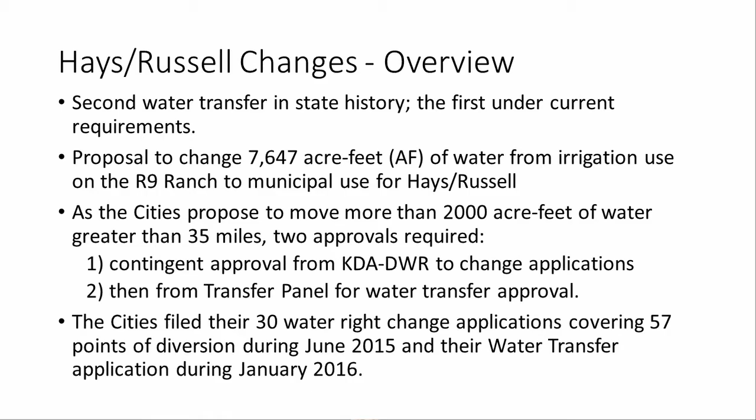The city is proposing to change 7,647 acre-feet of water that's been historically used on the ranch for irrigation use to municipal use for their purposes. So I think I've covered the rest of that.

This is a map of the ranch. In this particular map, and there's a different map in the package that I'll talk about, the red triangles are the existing irrigation wells as they are approved and have been used historically, and the blue pentagon shapes are the proposed locations for the municipal wells.

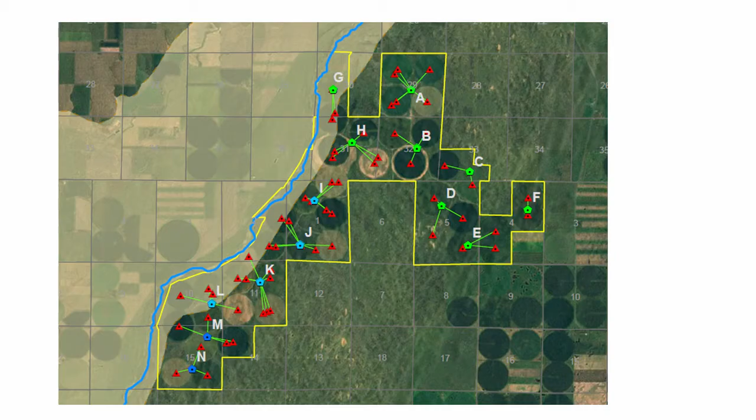They're consolidating various existing authorized irrigation wells into their new proposal. Some of them are blue and some are green. This is a similar depiction, just without an aerial photo in the background, and I think you've got that in the package that was presented here if you want to refer to it either now or later.

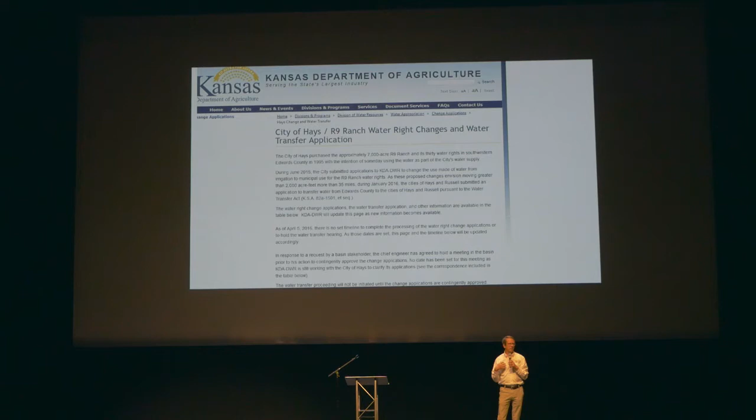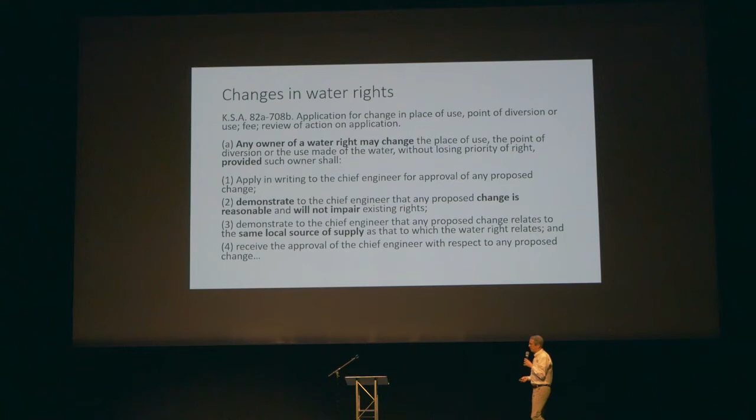I think I've covered most of this. This meeting concerns the change process. I'm not taking questions about the water transfer process that is ahead. The change application decisions are prerequisite to the water transfer process. Again, this is an informational meeting to give you more information and take public comment as input into the decision process. Once the changes are approved, then the water transfer process starts.

This is a section of statute from the Appropriation Act that talks about changes in water rights. Under our Kansas statute, the Appropriation Act provides that someone who owns a water right can apply to have their water right changed. Those changes can be to place of use, point of diversion, use made of water, or any combination of those three. Here the city is asking to change all three: the use made of water, irrigation to municipal; they're reconfiguring the well fields, so the points of diversion will all change; and the place of use will move from the ranch to the cities.

In order for a change to be approved, since water right owners have this right to apply for their water rights to be changed, certain things have to be found true. The change has to be reasonable. We have to know the change will not lead to impairment of other water rights. And the changes have to be within the same local source of supply.

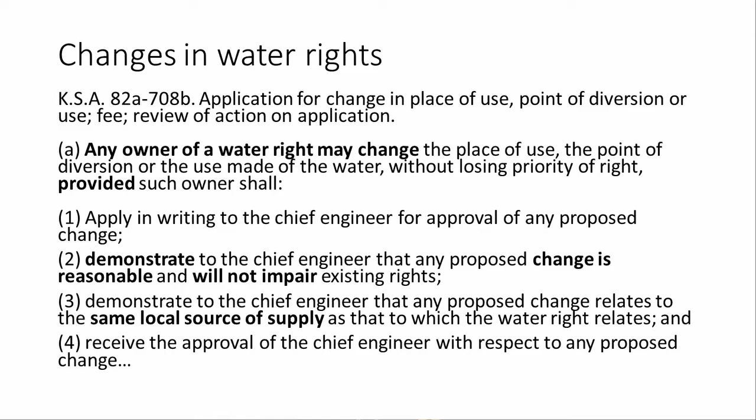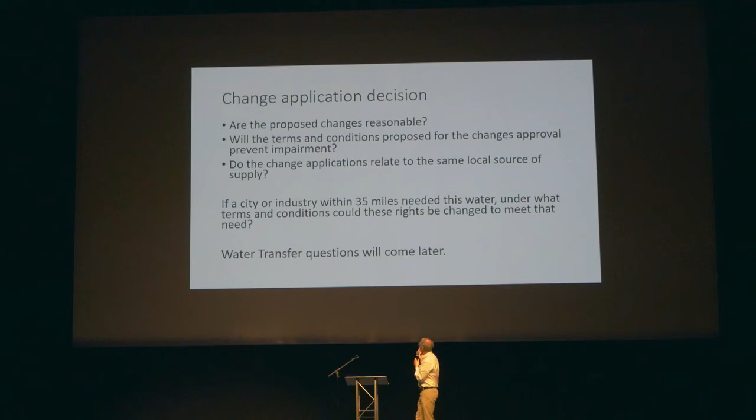And then receive the approval. So really, fundamentally, what we're doing here as we evaluate the city's changes is making sure these things are true and establishing the terms and conditions that make the change reasonable, that ensure impairment will not occur, and so forth. That's really what the process is all about. And again, I've gotten ahead of myself here.

Are the proposed changes reasonable? Will the terms and conditions prevent impairment? Do they relate to the same local source of supply? Again, the transfer process is ahead. I'm evaluating this package as if a city or industry within 35 miles - in other words, one that does not trigger the Transfer Act - is asking for the R9 Ranch's water rights to be changed. Again, what terms and conditions are necessary to prevent impairment and protect the public interest? That's really the question.

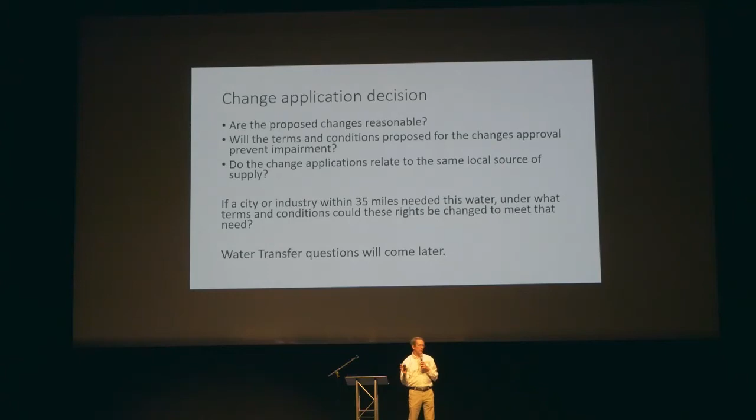The water transfer, weighing the receiving basin versus the donor basin, and all those decisions are for a later process.

I'll repeat this slide in a little more detail later, but we're here to have this meeting. At the end, if you've heard something and want to provide written comment for both the Groundwater Management District and me to consider in our processes, we'd like to receive those comments in the next 3 weeks.

The GMD is really the next step in the process. They have to review all of this and make a recommendation to me as part of the process as well. I think they'd like to have your feedback too as they make their considerations. I've asked the GMD to provide a recommendation to me during August, and then I'll be evaluating the full package of everybody's comments and making a decision in the early fall. Then the transfer process would kick off. So, okay, that's my part.

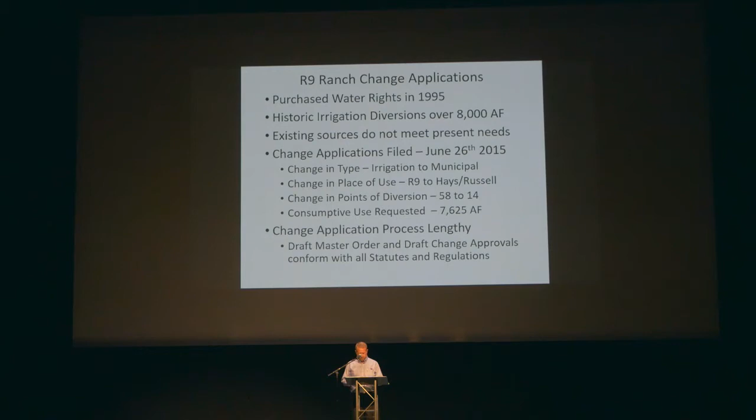The change application process is unique because it is part one of a two-part process. When the change application is deemed complete, the cities will undergo the provisions of the Kansas Water Transfer Act. Because of this unique consideration, because of the unique situation, the cities asked the Division of Water Resources for a few considerations.

The cities asked for a delayed effective date of the order. That allows the cities to navigate the transfer process before the order formally becomes effective. The cities also asked for deferred identification of the final well locations. This will be discussed a little further in our presentation.

The cities asked the Division of Water Resources to approve the total quantity with the order, with actual usage based on demonstrated need. This is also going to be discussed further in our presentation. This aspect is critical to the long-term economic viability of the R9.

Most importantly, the cities are committed to a sustainable operation of the well field. It is not in the city's best interest, and the R9 will not be a long-term economic project, if we don't use it sustainably. The cities plan to agree to a sustainable yield limitation in the master order. This is a unique change application requirement, and unique in the state of Kansas. The cities feel they're going above and beyond with this commitment to sustainable operation.

Earlier today, I was told there were a couple questions about usage of the property as it is transitioned to a well field. Beginning in 2013, farming was phased out at the R9. 2017 was the last year of crop production. I believe there were 7 circles in operation in 2017.

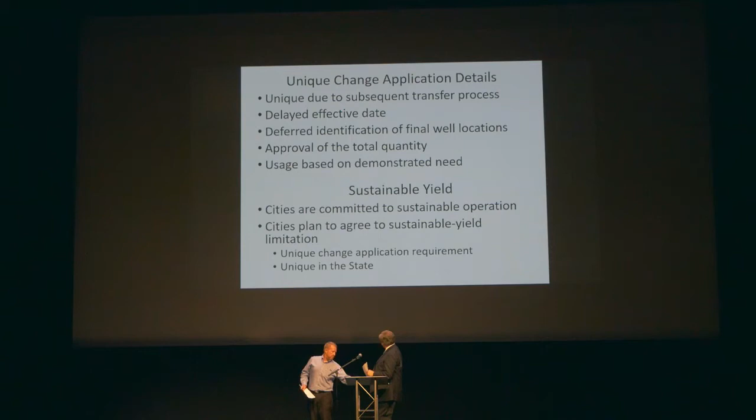So, these changes are unique in some ways, and they're ordinary in others. They're ordinary in the sense that the draft master order that we've been discussing and negotiating with DWR complies, as Toby said, with all the rules and regulations.

There are no waivers of the regulations, either DWR or GMD regulatory requirements. But we did file these applications in preparation for a transfer, and the normal process for making a change involves testing and design, figuring out where you want the well, then a change application, then approval, and then well construction. Because the transfer proceeding is coming up, we asked for permission to move the testing and design process to the end, so that it can be done in conjunction with the design of the overall project, the pipeline, and other infrastructure components. And DWR was willing to do that.

As a result, we asked for some flexibility, greater flexibility than is normally the case, with respect to the exact well locations. And I think Brian Meier will talk a bit more about that here in a few minutes.

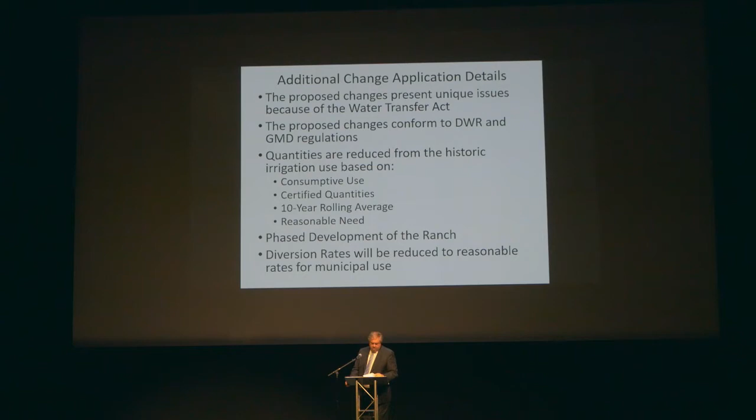And we anticipate them actually diverting significantly less than 500 gallons a minute. So if the master order is approved as drafted, the quantities of water that can be diverted in the long term are sustainable, even though other water rights in the region are not so limited. With that, I'm going to turn it over to Brian Meier.

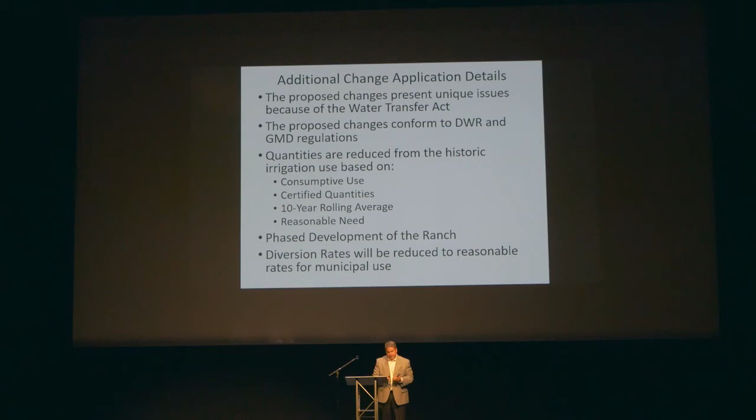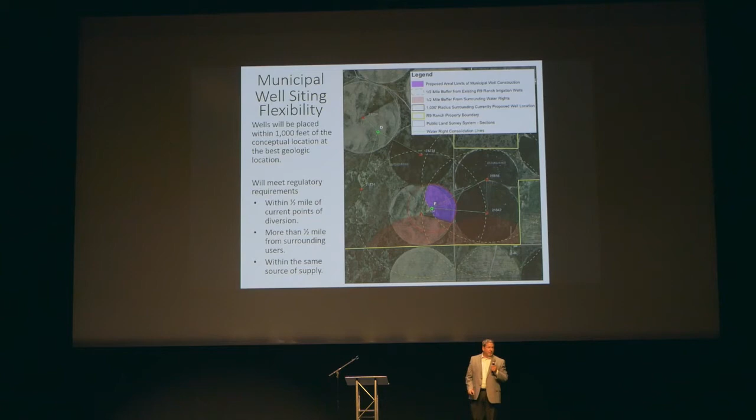As Dave said, I'm Brian Meier with Burns & McDonnell. I appreciate the opportunity to be here today. As you've heard, it's kind of a reoccurring theme: this is a unique process because of its length, its two-step nature, the change applications followed by the transfer process, which creates some unique challenges. They've been mentioned in general, and I want to go into a little more depth on a couple of those specific challenges.

The first one is looking at taking those 50-plus irrigation wells and consolidating them into 14 municipal well locations. Knowing this is a lengthy process, and as Dave said, deferring the significant field investigation to a later point in the study, we had to look at what's the best reasonable alternative to determine those locations.

So we started with the requirements of those change in point of diversions. Well, you want reasonable control over it. This example shows that we're looking for proposed well D, for a municipal supply point, close to these three wells. So what would be the basic requirements?

Well, we need to be within half a mile of each of those former irrigation points of diversion. So you have those circles, which create this rather unique geometry or area that you identified. Then another requirement was that we want to stay at least a minimum of half a mile away from any other authorized point of diversion. So you see down here in the shaded color, which also added to, or changed, the geometry of that area that would meet those requirements.

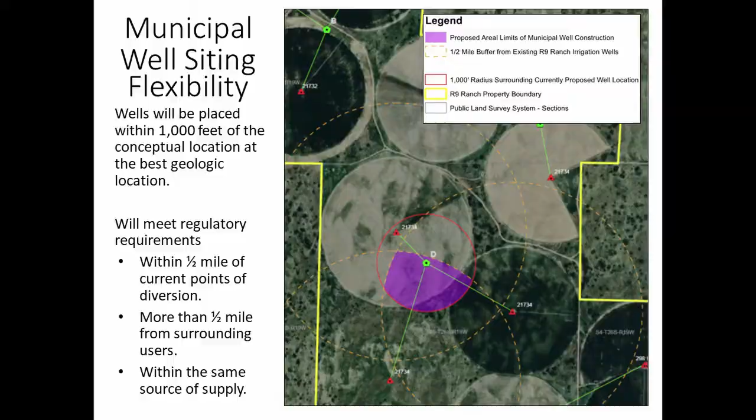So once we established that, we're looking at the next theme you've heard a lot about that makes this project unique, and that is the commitment to sustainability, which is such an important element of any public water supply planning process. This has to be something that's viable for the long term. So how do we determine that?

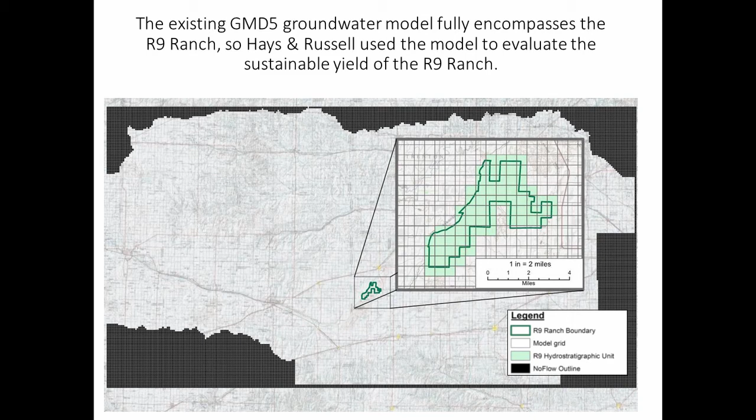We know we had the 7,625 acre-feet determined from the consumptive use. Well, what's the real number that defines sustainability? In this case, sustainability is those withdrawal rates that will result in long-term stable water levels. So how do we determine that? Well, we went out and looked to see what tools were available. And of course, one of the main tools available was the GMD5 model, which had been reviewed, vetted, and approved for similar use. So that seemed like the logical tool to use.

And of course, it covers the entire GMD, which encompasses the ranch. So it seemed like a good path you could take.

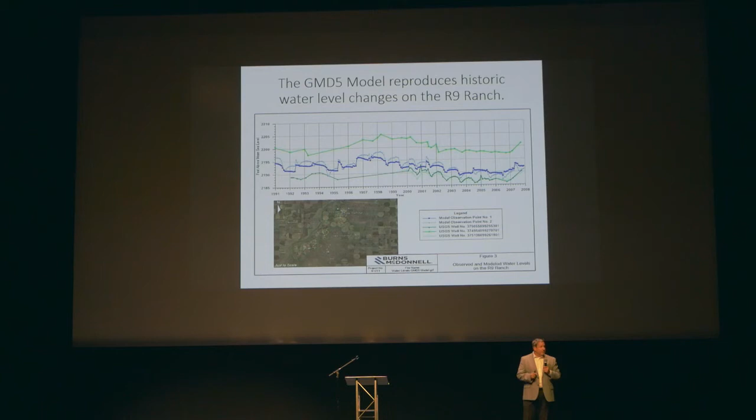But the next step was to make sure that in the ranch area the model was going to perform adequately. We needed this, so we picked a period where we had good information regarding what was produced on the ranch, good numbers, good data, and we also had good observed water level responses during that same period. So the model was run through that period with actual data and compared to the observed water level changes on the ranch. This graph demonstrates a very close correlation between the water levels the model produced and the water levels that were actually observed. That gave us confidence that this was a good tool to use to move forward to calculate sustainability.

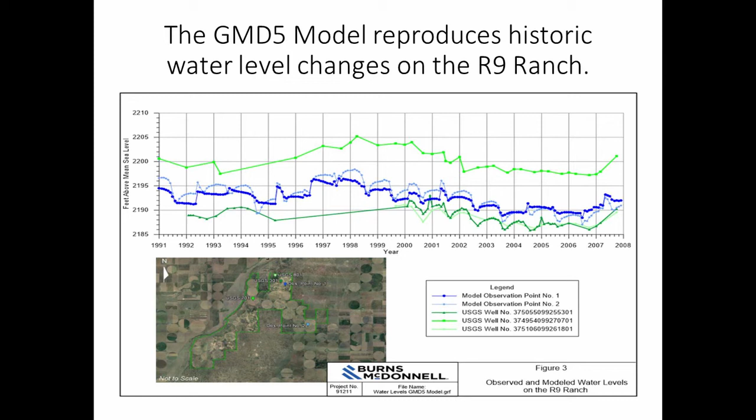So the next step was to do iterative model runs, to look at what that capacity or diversion rate was that would produce those sustainable water levels. In this graph, on one side you see the quantities diverted in various scenarios, and on the bottom you see the change in water levels. We ran a number of scenarios using those same observation points on the ranch to look for that stable water as a result of the model run. The green box in the middle represents a band of stability. In general, 4,800 acre feet was the number identified as a sustainable yield where you would see those relatively stable numbers long term. So those model runs were used to calculate that.

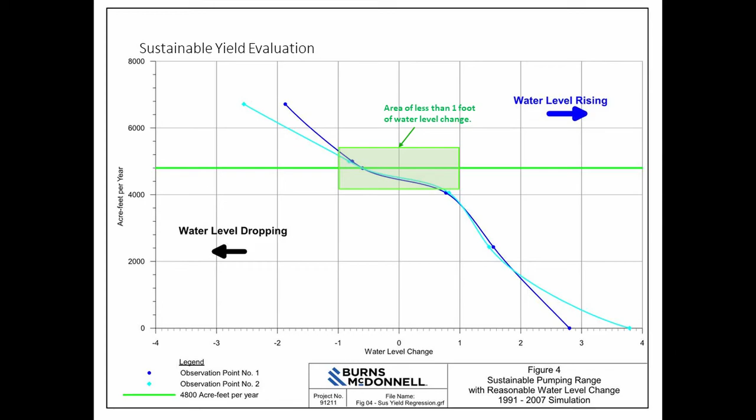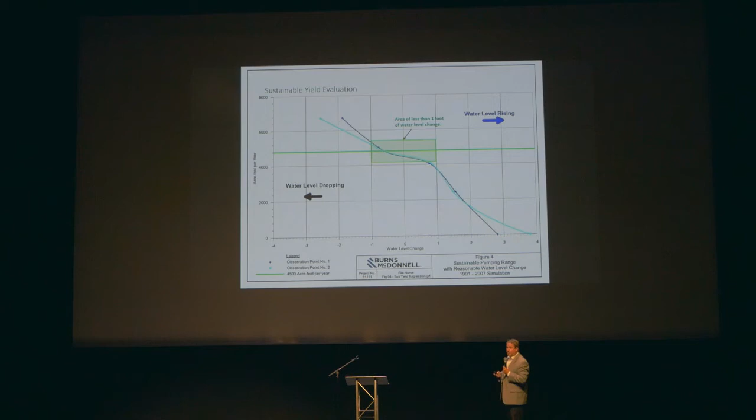So what does that sustainable operation really mean? Well, as Dave said earlier, in any given year we have the capability to produce up to a maximum of 6,700 acre feet. But on a 10-year rolling average, 4,800 acre feet per year is the max. And also, as stated earlier, with the planned phased development of the ranch, it would be a long process to work into those upper levels of development or higher quantities.

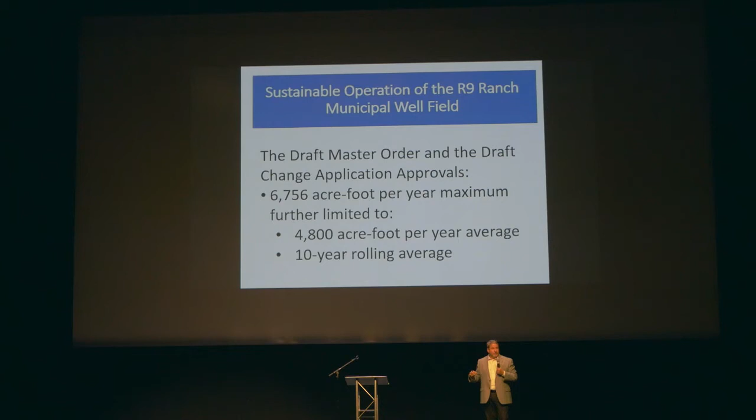Additionally, when we looked at this sustainable approach, and considered what the Great Bend Prairie RAC goal was—to provide sustainable groundwater withdrawals by 2025, I believe—we felt like this was a good match and a good approach to take. With that, I'll turn it back over to Dave.

Okay, from here I'd like to do a brief overview of the draft approval documents. Again, we've got these on our website. There's one you referred to as the master order. It's basically a draft proposed order that would approve these applications. Again, we're not through the process yet, so it's not final. The input we're receiving from the GMD and you all is going to potentially affect the order.

And then we've got another document that's really an attachment to the proposed draft master order, which are the individual approvals, showing the specific terms and conditions of each individual water right and its proposed attributes after the change. So I'm just going to go through and highlight them. The cities have already talked about some of the features, so I won't go into a lot of detail where they've already covered it.

Now, first of all, why do we have this draft approval document at this point? I wanted to talk about our general process for reviewing applications. Normally, we receive an application from a water user that wants to change a water right. We review that application for completeness, and we review it for conformity to the rules. There's sometimes some back and forth with applicants to make sure that the change is going to meet their needs that are spurring the change, and again, meets our rules.

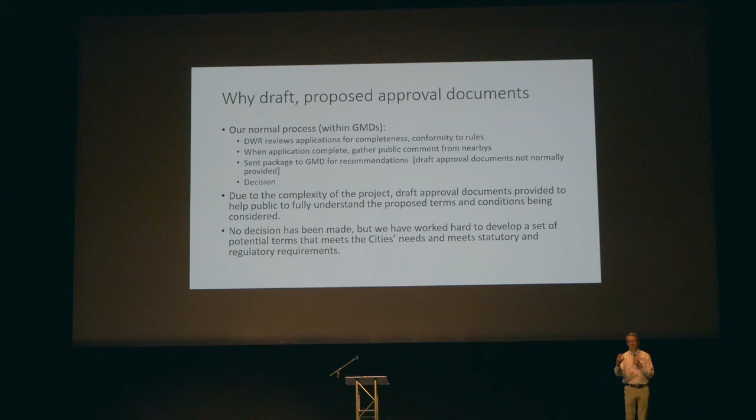Again, no decision's been made on the final documents. We're still in our process here. But I will tell you that we've worked hard with the cities to come up with a set of proposals that meets their needs and also fully meets the statutory and regulatory requirements. We believe that. Now we're here to hear from the GMD and you all to make sure we haven't missed something.

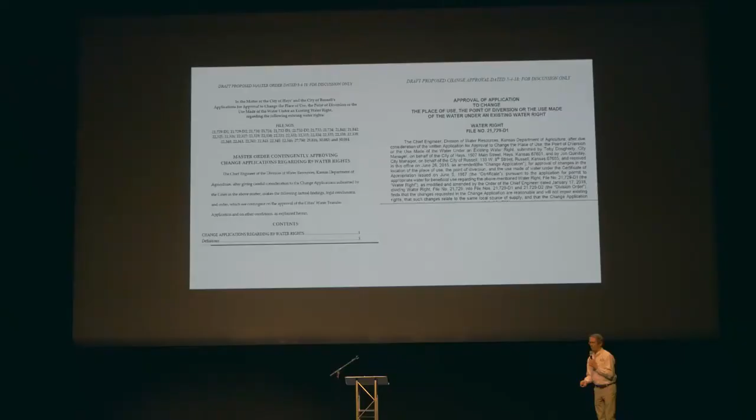So I've showed you the documents. That's just what the first page of the master order looks like and what one of the individual approval drafts looks like. I'm going to walk through the major features of most of these. The narrative here is in that handout, which we've tried to use to look at the major features of the proposed approvals and the applications.

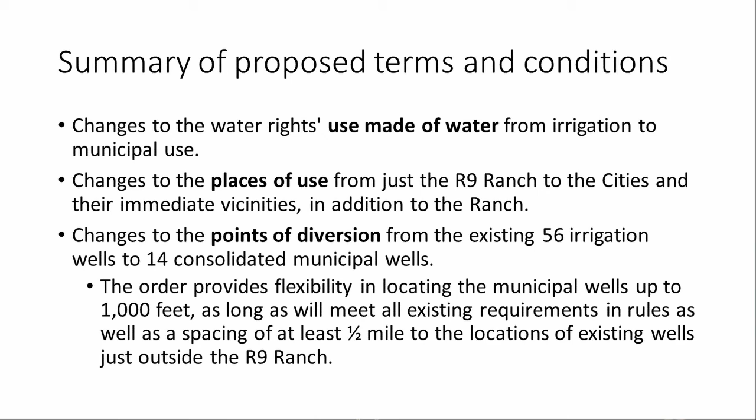Changes in the use made of water, the place of use, the points of diversion, and Brian's already done a good job of explaining the flexibility we're providing in this order to move up to 1,000 feet within those purple areas that meets all the statutory and regulatory requirements.

So after the changes, when we do these changes, each and every water right is evaluated separately, and we do an evaluation of the consumptive use as we change from irrigation to some other use. We have a set of rules, K.A.R. 5-5-9 through 12, that basically determine how much of the irrigation use can be changed to a new use. We've reviewed those requirements and applied them to each and every water right and then summed them together.

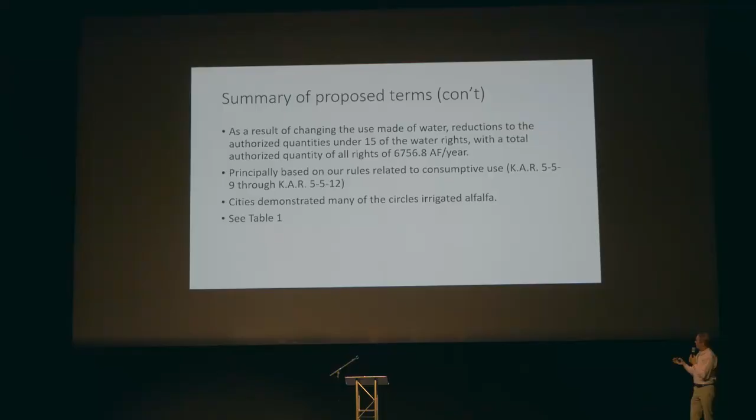Now, the rules generally look at, rather than looking at the historic use, we look at the maximum historic acres, and then we typically use the net irrigation requirement to determine the consumptive use that can be changed. Where alfalfa is demonstrated, then we use alfalfa. About 55% of the pivots had alfalfa as a crop during the perfection period, and the rest used corn. There's a table that goes on several pages that basically tabulates the crop that was used for each water right and the resulting consumptive use applied to that water right. They were summed together to get the 6,700 and change total.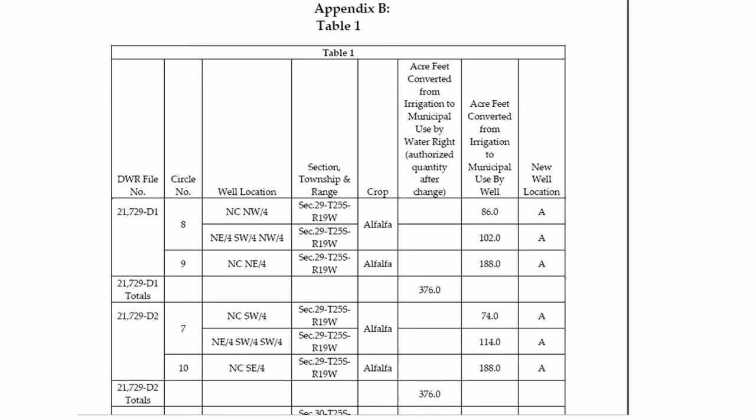So the next thing, and the city spoke about this, is the imposition of a 10-year rolling aggregate limitation that's tied to their evaluation, which we reviewed, as to the long-term sustainable yield of the ranch. That was found to be 4,800 acre-feet.

This is not in our rules. This is not a normal provision. Normally, the consumptive use is the number. I'll take responsibility for this. This is an imposition that I made to say, this is a long-term water supply. You're coming asking for a long-term supply for the ability to scale this up over time. For me to say this is reasonable, I need you to show me that you can sustain this use. And so that's where that number came from.

There is provision in the order that if, right now, this imposition of this special condition is for the city's benefit. It's not to provide more water to the region. So they base it on this area's been closed, and as long as it remains closed so that the city benefits from them restricting themselves, they're good with it. And so if we open up...

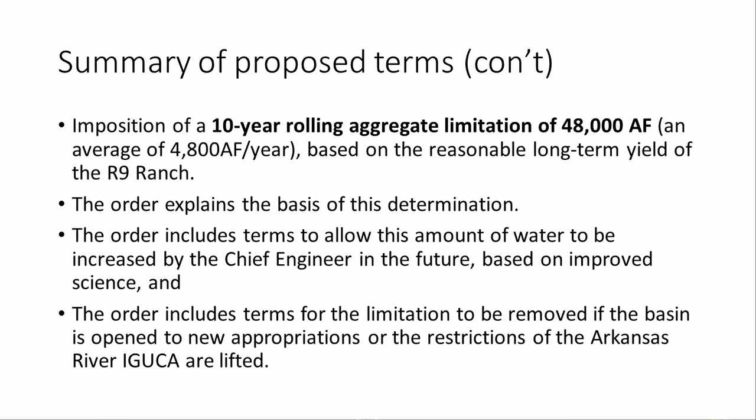They use the best science, at least in our view, the best science. They wanted the opportunity, a decade or two from now, if there's a better groundwater model and it demonstrates a different, better number, to come back and argue that. That would take them bringing the evidence and the chief engineer at the time reviewing and approving it. Most likely, I can't speak for future chief engineers, but there'd probably be a hearing process and some public process to review that. So improved science could change that. I'm not expecting it to happen, but better science may do that.

Basically, if we open up this basin to new appropriations, then the restriction goes away because this is for their benefit. And the same with the restrictions in the Ark River IGUCA.

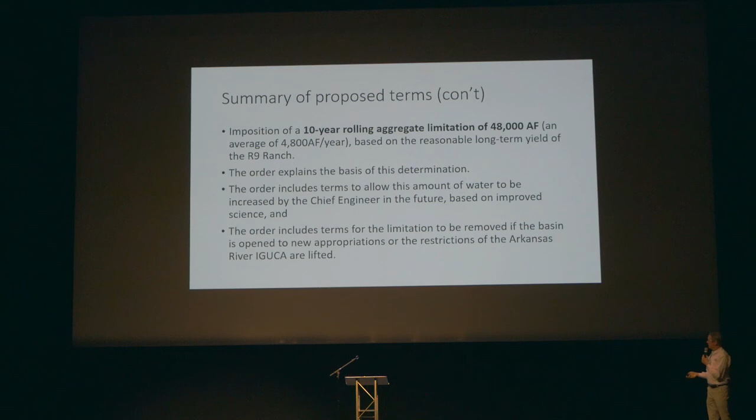Again, David spoke a little bit about the reasonable municipal need when we approve a change. It has to be reasonable, so I can't approve a change for more than the city needs. So we've restricted them to the reasonable municipal need that we projected for the coming 20 years, and then there's an opportunity to scale that up as they develop population or more industrial customers.

And again, in one of the attachments, attachment E, it sort of goes through the details of that procedure. If you want to talk more about that later, we'll do that in the Q&A.

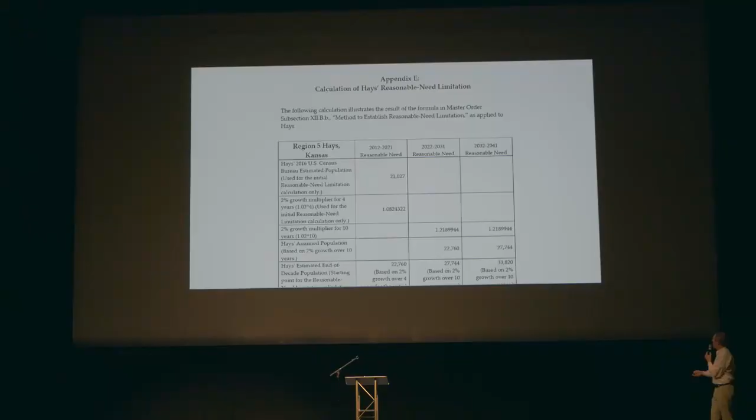So their rates of diversions, again, I have to find that the change is reasonable, the rates are reasonable. As Brian indicated, the irrigation rates are needed to supply irrigation demand during just a narrow part of the year. Those rates are not reasonable for the change.

So there's a very complicated procedure that I hope you all don't want to know about in this setting. We can sit down with those who want to talk about it, but we have a table 3 that works through how we did this. They've got these wells that each have different quantity limitations and rate limitations. They're combining those into a new, lesser set of wells, and in some cases multiple PDs under a certain water right are going to different consolidated wells. Again, we can walk you through this if you really want to know it.

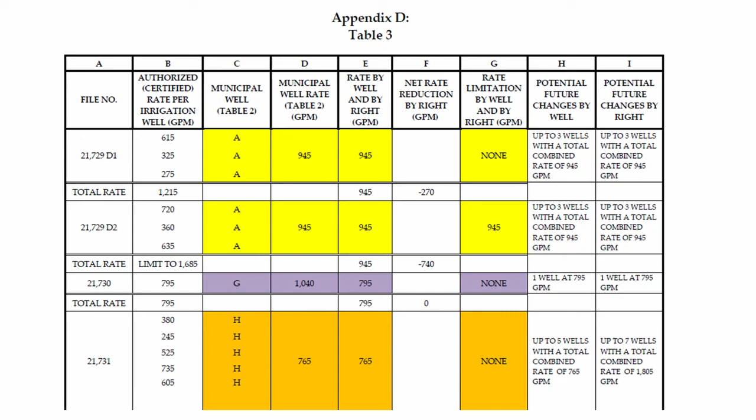But again, the city is giving up a lot of rate, as I think Brian mentioned. We have reporting requirements in the draft master order, a monitoring plan, and again, as the city mentioned, there's an effective date. These changes will not become effective until two things happen.

Number one, assuming they're approved, the changes are not effective until there's an order from the transfer panel, and then really until Hays enters into a written contract to develop the well field and the remaining infrastructure. So they may get through the change approval process and the water transfer process, and then not be able to get financing, or something else could cause a problem.

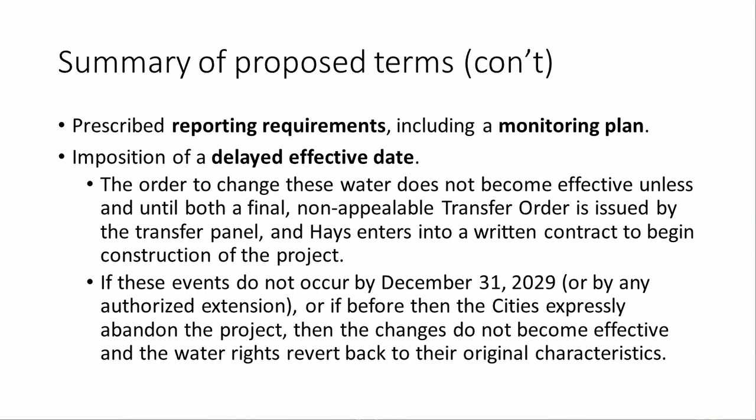Once the changes are approved, the transfer is approved, they get all their easements and issue contracts, then the changes are effective. If at any point in the process the city says this isn't going to work for whatever reason, the changes do not go through, and the water rights remain as they are today.

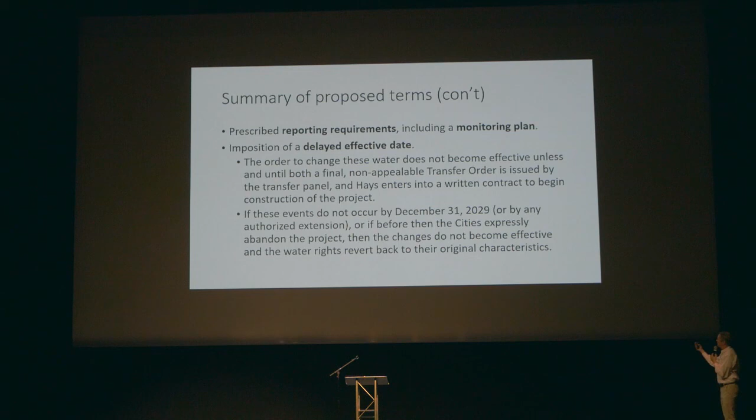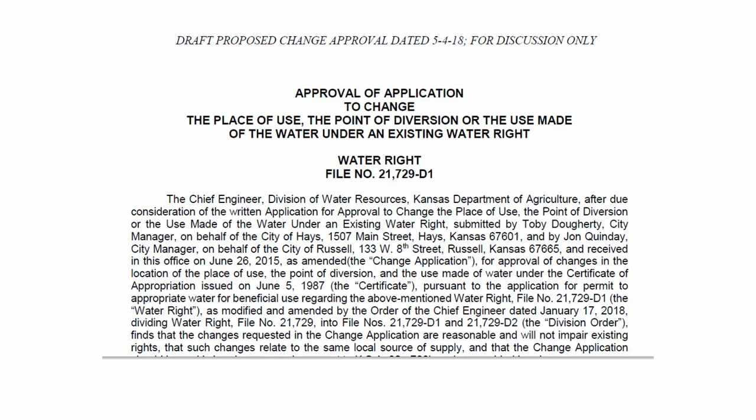And we have a date when it will happen, but again, if the city isn't ready, they can ask for extensions. So also in the packet are the individual approvals for every water right. We have a draft of what that approval document would look like, what quantity and rate it's restricted to, and any restrictions combined with other water rights or points of diversion. Again, all of this is on our website if you want to go there for more.

And again, I think I've pretty much hit this before. We would like, if you've got written comments, we're happy to have them after this meeting. The GMD is working through its process, so if you could provide those by July 13th, which is three weeks and a day from today, that would facilitate their review and our review. Just send your written comments to us, and we'll make sure that we have them and that the GMD has them as well.